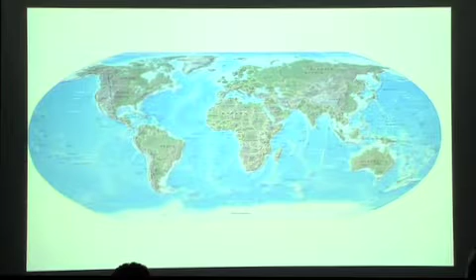It's all very simple because Antarctica is the little white bit at the bottom - that's where penguins live, just in case there's any doubt. The bit at the top is where the polar bears live. So we're doing mostly penguin land for about 90-95% of the talk, and we'll just touch on polar bear territory at the very end.

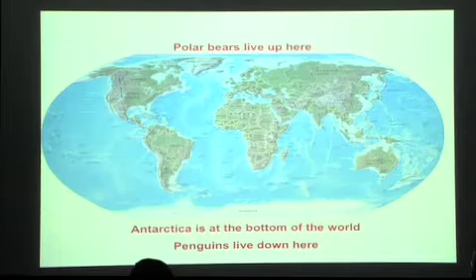But it's also a very dynamic continent, because changes in sea temperature over the last 100 years, which are accelerating significantly at the moment, are creating dramatic change in the Antarctic. I'll talk a little bit about that later on.

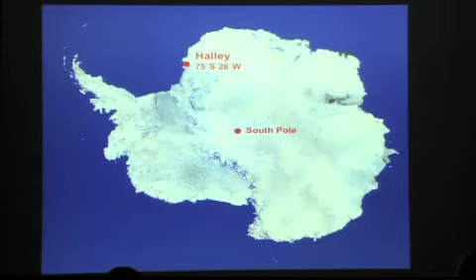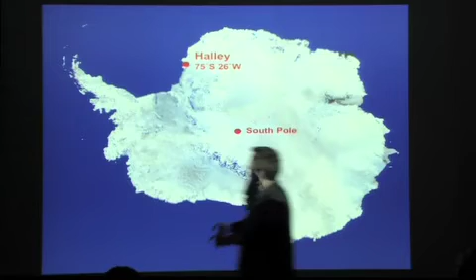The South Pole has an American station, and the station I'm going to talk about first is called Halley. It's a British research station at 75 degrees south, about 900 miles from the South Pole. Britain has 2 big stations in Antarctica - one at Halley, and the other at a place called Rothera.

When you join Rothera to the South Pole and the South Pole to Halley, that is the area of Antarctica that Britain traditionally claimed, although all countries have recently renounced their claims under a special collaborative treaty. Nonetheless, our stations are positioned absolutely at the edges of our territorial claim.

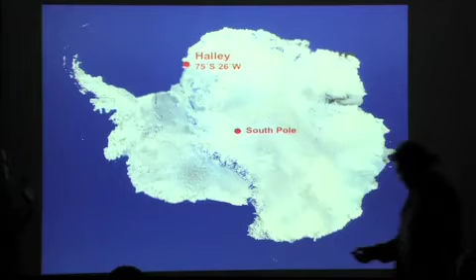Now, some countries maintain their claim by having soldiers there or an airport. But the British, we maintain our claim by having 2 stations, and we mark our territory by having a post office at each of them.

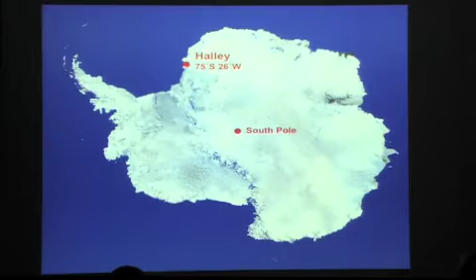You can click there. Yeah, brilliant. Oh, can I flick for the slides as well? Oh right, okay, that's good.

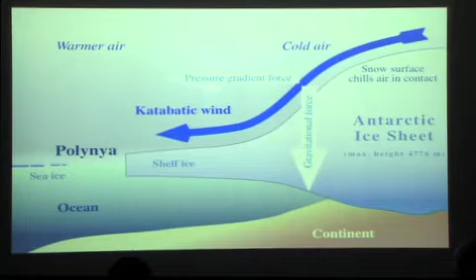So, as I say, it's located on an ice shelf. The ice shelf itself is about 150 metres thick, and it's flowing at a speed of around 400 metres per year out to sea.

Now I was just going to tell you about some of the main issues of climate that they have to deal with at the station.

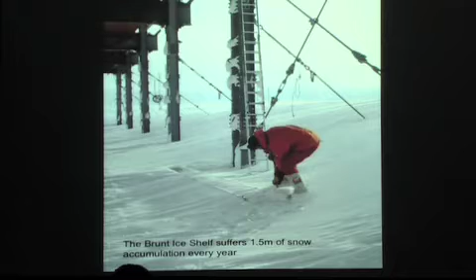And that's exactly what's happening with Halley 5, the current or just previous station - year on year, the snow level is rising by 1.5 meters. Anything you leave on the surface gets buried, so they have to deal with that by looking at ways in which they can elevate the building above the snow to stop it being buried. And that in itself is a very complicated process.

But because the snow level is rising by 1.5 meters every year, they need to jack it every year using electric screw jacks attached to the legs, which help to push it up another 1.5 meters. But because the legs are only a certain length, they have to weld some steel on the top of those legs. And then they have an additional problem.

The ice moves like water - it literally flows one plane over another. So those 20 legs all get distorted in different directions - one's going that way, another's going that way, and the legs all start pushing themselves in different directions. So every summer, a steel crew used to have to go out to Halley 5, and they used to grind off the legs at the snow surface.

Then they'd straighten up the leg above, weld in one of these big steel plates, and weld the leg back to it. Once finished, everybody on base works together to jack the station up. So this part of the leg is last year's bit, going down there, but the next bit of leg goes up here, and the next year it'll go somewhere else, and so on, until it's literally all over the place. The bottom is now about 30 metres below the ice surface.

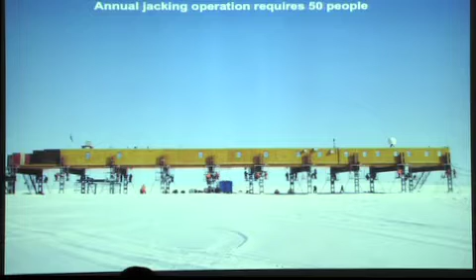But in the summer, the sun rotates all the way around the building because it never sets, since you're at the bottom of the southern hemisphere. As a consequence, when the sun moves off your basket, suddenly you're working at minus 20 degrees holding bolts and spanners, and it becomes a very, very cold process.

And you have to add to that the fact that people are living there — only 15 or 16 of them on a winter's crew. The winter lasts from February all the way through to December, so the winter period is 10 months long. There's 16 of you just living on the base, with no access by aeroplane or ship, so you're totally isolated. Add to that the cold, the wind, and then the next issue to do with human isolation is 3 months of total darkness.

So these people, from about the middle of May through June, July, to the middle of August, will not see the sun rise. All they will see are these spectacularly starry skies and displays of the southern lights.

But they have some neighbours — a colony of emperor penguins, which they go and visit every now and then.

When it comes to December, the base is restocked. That's the one time of the year they get any fresh food. So for about 2 weeks in December, they eat fresh salads, fresh vegetables, and fruit. Otherwise, everything is tinned or frozen.

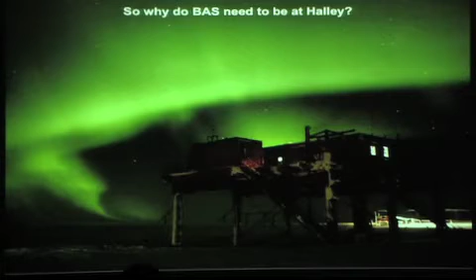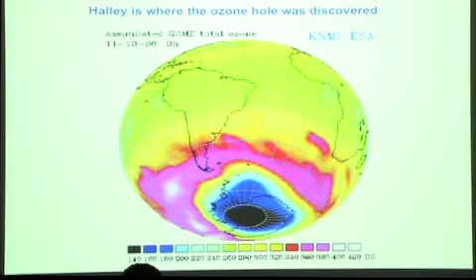So you might think, well, it sounds a horrendous place. Why would anybody want to work or live in a place like Halley? And the answer is very simple: it's because the science is worth it. So I'll just briefly explain why. First thing, 1985, 3 British scientists working at Halley discovered the hole in the ozone layer, which is probably one of the most important environmental discoveries of the last 30 years, and it led to the signing of the Montreal Protocol, which banned the use of CFCs, which again is one of the most important pieces of environmental legislation probably introduced around the world.

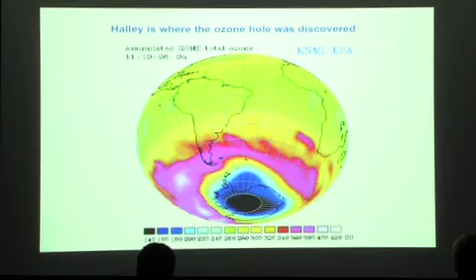So in addition to studying ozone and climate, Halley is also a fantastic window on space. It's at 75 degrees south, which is one of the best zones on the planet for investigating the interaction between the sun and the earth. Incredible research is carried out there into the thickness of the outer atmosphere and the impact of solar particles bombarding the Earth's atmosphere. And those kinds of pieces of research are what give us the information about global warming. So it is absolutely at the forefront of the research which is telling us about changes in the Earth and the systems which govern the operation of the Earth.

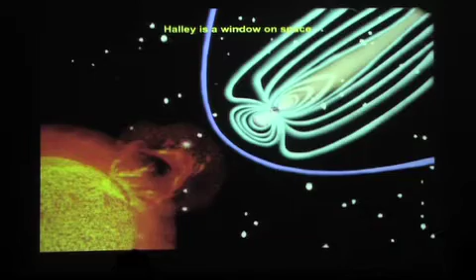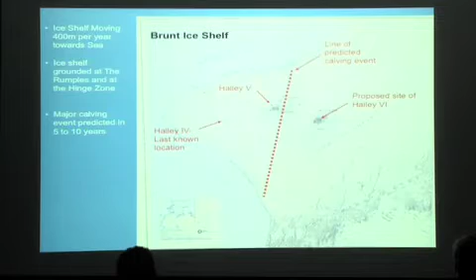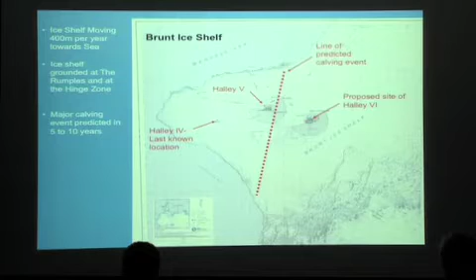And so where it's grounded, it starts flowing slightly slower. So a crack is appearing here, and there's another crack here. And the crack will slowly follow this dashed line. As you can see, Halley 5 is on the wrong side of the dashed line, with its legs stuck 30 metres down in the ice. And that causes, obviously, a significant problem. There's about 5 or 10 years predicted until all the stuff off to the left, which is about the size of Wales, disappears on a giant iceberg.

So as a consequence, the British Antarctic Survey realised they needed to do something. And, of course, when you need to do anything, the best thing to do is to hold an architectural competition. So that's exactly what they did. They held an architectural competition to come up with a wholly new way of designing a research station which would help them to overcome this problem that they'd had. Halley 5 is named because there had been stations before it, with the problem of all the previous stations disappearing on an iceberg.

So they had this competition to find a design for a relocatable station. They had 86 entries from around the world. 6 teams were shortlisted to develop their designs. Then they chose 3 who then did a much more detailed design. And then out of that, we were very lucky to win the competition.

Before I show you our design, I'll give you a whistle-stop tour through the history of Antarctic architecture. You might be thinking this is going to go on forever, but the truth is it's a very short subject. It's 100 years long, but there are probably only 3 different building types.

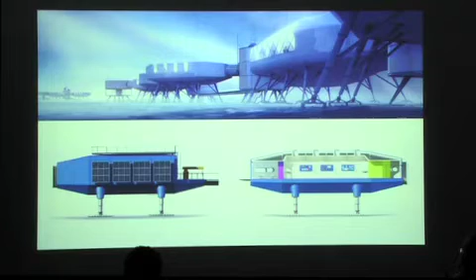When it comes to relocation, each one of those modules can utilise hydraulics to lower down closer to the ice surface, bringing its centre of gravity down closer to the ice. They can be rigged up with steel bars and then use the skis and tractors to be pulled to a new location.

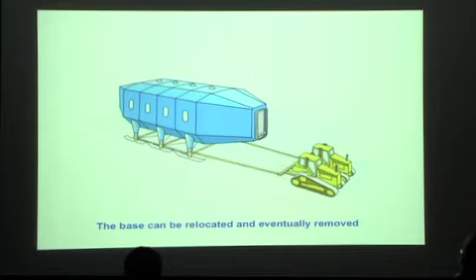Within each of the modules, the start planning device was really the bedrooms. A lot of thought had to go into the bedrooms because we wanted them to be comfortable, but we didn't want them to be so comfortable that people just hide in their bedrooms at the expense of the overall community. So they have a place that you can sit and work at a desk. They've got quite a bit of storage, a nice view onto the ice, but they're not so comfortable that you can have loads of people in your room or hide in there watching TV, literally escaping from the community. In the winter, you get a room to yourself. In the summer, you share with somebody who's coming in, sometimes for a few days, sometimes for 2 or 3 months.

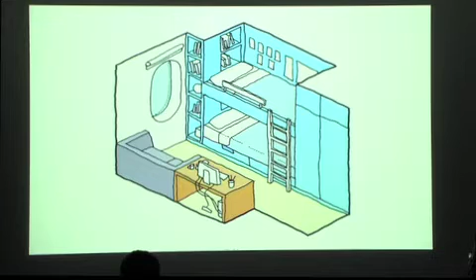This is the kind of basic plan of a module. You had 4 bedrooms, either side of a central corridor, and to break down the feeling of corridor, we have enlarged threshold spaces where you move from one module to another, giving access into things like the toilets, showers, storage rooms, but also views out into the landscape. So there were spaces of light and dark as you move along that corridor. The corridor widens out where you get the doors into each of the bedrooms, and it also has a higher ceiling with roof lights in to allow some light in the summer.

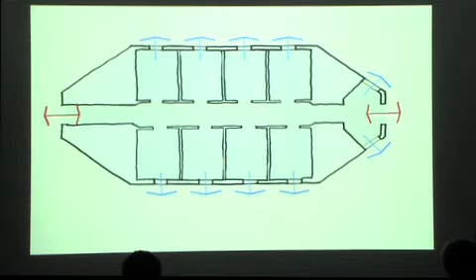Within the bedrooms, one of the areas where we put a lot of research was looking at how to help people overcome the issues of 3 months of darkness. Because in the darkness, you can have this terrible problem of falling into a sort of biological free fall, where, because it's always dark, you stop recognising the time to get up. So instead of getting up at 8 or 9 in the morning, you get up an hour later, and the next day, another hour later. Before you know it, you're getting up at 8 or 9 at night, and all your friends are still getting up in the morning.

We also worked with a colour psychologist called Angela Wright, and she developed a special palette of colours that we've tried to use through the majority of the station. She called it the Spring Palette, and the idea was both to assist wayfinding, but again to give a bright palette which helped people overcome that constant issue of darkness and seasonal affective disorder that you get in the winter.

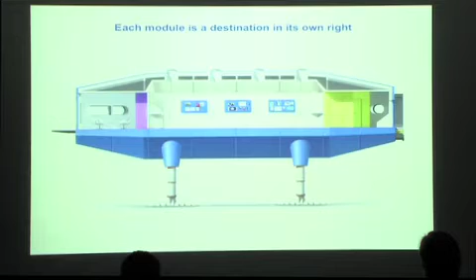Through that use of colour, volume, and thresholds, we were working at a very elementary architectural level to make sure each module became a sort of place in its own right—that every time you entered a module, it felt like a point to stop, to breathe, to think, 'alright, I'm doing this, I know where I am in the station,' rather than just having one single-width, long corridor running along the whole building.

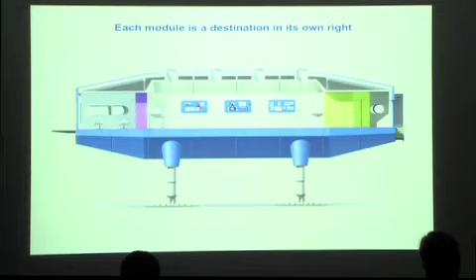And you might be thinking, 'oh, I wonder why you even had to have them in a straight line'—I'll come to that in a minute, but it was a very important climatic feature which forced us to do that.

As well as being a place to live, Halley is also a place of phenomenal scientific research. One of the most important features of that is to give as much flexibility as possible to allow significant changes in direction of scientific research to take place.

Each of the modules has a three-dimensional space frame substructure, which gives lots of space for service distribution within a warm envelope, and its superstructure is all on the outside. So all the walls and ceilings can be demounted and changed when we need to account for different experiments.

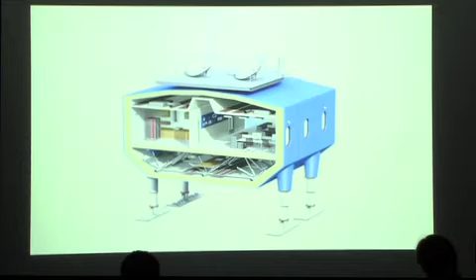With that whole concept, we were able to accommodate virtually all the features required of an Antarctic research station. But there was one thing we were having real trouble with, and that was the main communal space, because it just couldn't fit in one of these blue modules. You needed more space than that for kitchens, dining rooms, a bar, and other recreational spaces.

So the solution was to design what we call the central module, which is the focal point of the whole design. This is a two-story module. One of those blue modules is about 160 square meters in floor area, this one's about 360 square meters, so it's a bit more than double the size.

On two floors, with as much open plan space at the lower level as possible, so that you get people having a meal, playing pool, in the bar, all sort of doing everything together.

That was a very important design decision, because we had noticed in a lot of stations that they had broken down activities into cellular spaces, and you started getting very disruptive cliques building. You'd get the gym clique, and they wouldn't allow the odd tubby bloke like myself to come in and just do half an hour a week.

And then you'd get worse than that, you'd get the drinking clique. They would shut the door on the bar, and someone who just fancied the odd beer felt uncomfortable opening the door, hearing them all having such a good time inside. So we were very keen to break down as many of these potential cliquey barriers, just with very simple, open plan designs for space.

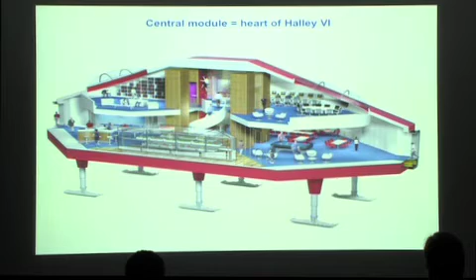There are two other features in here, neither of which, unfortunately, we've been able to include. One is a greenhouse which grows fruit and vegetables using nutrient-enriched water. It's a process called hydroponics. There's all the infrastructure in there.

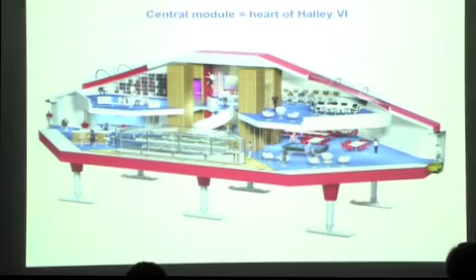The idea was that would give people salads during the long winters, but we haven't managed to install that as yet. The other feature: we thought, well, people in the Antarctic are really outdoorsy. They all love doing skiing and kite surfing and loads of sort of cool outdoor stuff, so I thought we'd better bring a little bit of that inside.

So as an alternative to the stair, we introduced a climbing wall as the means to get from the lower level to the upper level. To start with, they thought, yeah, that's a really great idea, until the health and safety officer pointed out that the climbing wall is just next to the bar, and the two may be sort of mutually exclusive. So they decided to get rid of one of them.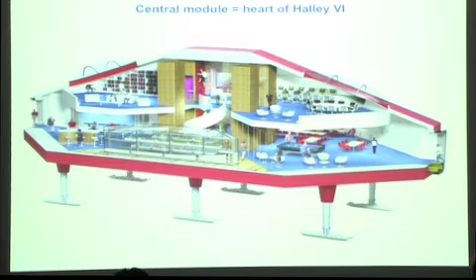These are just some views from a fly-through we had done, which show the inside. You can see the open plan spaces on the top two shots, and then some of the more enclosed spaces on the upper level.

On the two main spaces in the upper level, we have these big domed roof lights. The point of those was that you could then walk into those and be fully enclosed in glass, so that in the winter, when you get the southern lights flashing all around you, you could have that experience as a sort of full semi-dome experience happening all around you, which is a pretty awesome experience in its own right.

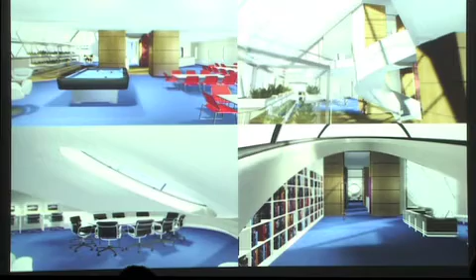Now, this is the explanation as to why the station is arranged in a straight line. For 95% of the time, the wind blows from one direction only, east-northeast.

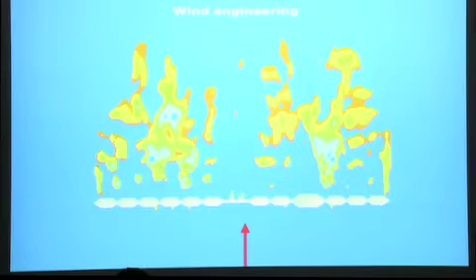So the wind blows towards the modules, and then as it passes underneath, it starts decelerating again and drops it in giant drifts. This was from a computer fluid dynamic model, which was done by a special firm of wind and snow engineers from Guelph outside Toronto.

Who were predicting where the big drifts would take place on our building. When we went to see them to start with, we had an arrangement that was more like an X shape with our central module at the middle. And they very quickly demonstrated to us that the first line of the X, the wind would accelerate underneath, pick up snow, and then it would very quickly bury the second line of the X. So they said, this is what you have to do to get this building to work.

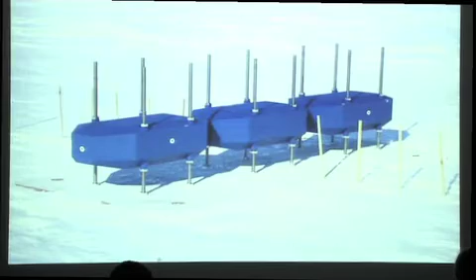We thought, well, that's all great. We've had computer models done, but we need to be really sure that this drifting analysis is all going to work. So we did some smoke testing in the Building Research Establishment in Watford, and then we also had these scale models built. We put them on the ice at Halley. And then the scientists worked out that if you got a wind of a certain speed on a certain day, at 1 to 50, that would equate to the wind through a whole winter season.

So we put these modules down facing the direction of the prevailing wind, and then one night there was this big storm, which they say equated to a whole winter season of storms at 1 to 50. And then we got snow drifting all around, but we could see that the wind speeding up underneath had cleared all the snow and ice away from the ski-based foundations, keeping them free from snow.

So having established that it was going to be a line, we then had to decide which things went where. We put all the sleeping off to the north end with the main command module, which is where the base commander, the doctor, air traffic control and so on are. Then our main social module, and then at this end, two science modules, and then two of those mechanical equipment modules, so that you could have generators in both.

And then we separated them with a bridge. The reason we did that is because if there's some catastrophic failure or a fire, you could escape and live in the other half until you can be rescued. And you might not be rescued for 6 months. There's no fire service, no support structure, nobody to come and get you, and it's too cold to fly an aeroplane in and too difficult to get a ship there. So you've got to be able to look after yourself until the emergency services can get in. That bridge is really there as a giant fire barrier between one half of the station and the other.

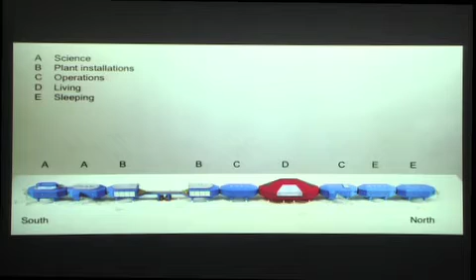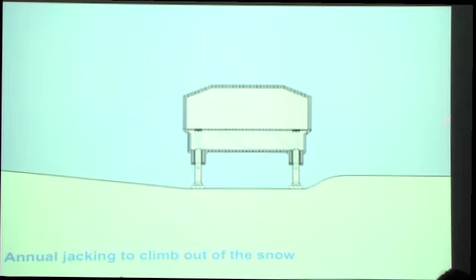Now, I thought I'd just quickly explain how that whole jacking process works with the building, to show you how it rises up out of the snow. So here you have a module in cross-section at the end of a year of snowfall. The wind is blowing in this direction here, so it's 1.5 meters above the building.

The wind hits here, speeds up underneath, picks up all the snow that otherwise would have accumulated, and then starts forming a giant drift heading off towards Madame Tussauds. And then what we do is use the bulldozer, lift the legs up, push new snow underneath, and jack the building in small measures to raise it above the snow level to get it all level again. I'll show you a movie of the final effect of that a little later on.

The next technical issue was how do we make the outsides of one of these buildings. We looked at all sorts of different solutions: highly insulated timber panels, highly insulated metal panels. But in the end, we settled on glass fibre panels. Glass fibre is used quite often in the Antarctic because you can make very large panels, which makes the construction much simpler. Also, glass fibre is thermally relatively unconductive, about 100 times less conductive than metal, for example. So you get much less expansion and contraction between the cold and when the sun hits your building, so your joints between panels are more stable, and you risk losing less heat through your envelope.

And here are just some of the earlier examples of glass fibre panels. These panels at the French-Italian base are that height from there down to there, which is about 20 metres high.

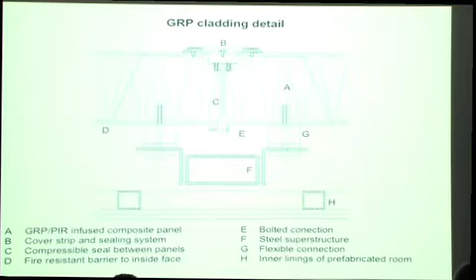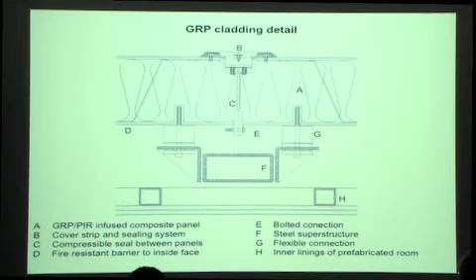I won't go into the nitty-gritty of the detail, except to mention two things. One is that our glass fibre panels are about 200 millimetres thick, and they're fixed back to a steel structure. The glass fibre was made in a vacuum, and we had glass fibre strands connecting the inside to the outside, so that when you get really massive suction from the wind, you don't get the outer skin being ripped away from the inner skin. We used a special kind of insulation called polyisocyanurate, which has closed cells of foam, so that you don't get any water migrating through the foam from one side to the other and freezing in the process.

The development of those panels took an enormous amount of time, because they have thermally very demanding criteria that they need to meet, but they also had very high levels of fire resistance that they had to meet. Combining those two processes in glass fibre panels was not easy, but it was achieved in the end.

In terms of energy, we wanted to use sustainable measures like wind and solar. The trouble with wind is that it blows so fast in such fierce gusts that most attempts to introduce turbines have ended up with the turbines scattered in small pieces all around the station. This is a German turbine. It's supposed to operate at 20 kilowatts, which is quite a lot of power, but they have to keep the brakes on and run it at 1 kilowatt, otherwise the turbine has a habit of flying off the shaft.

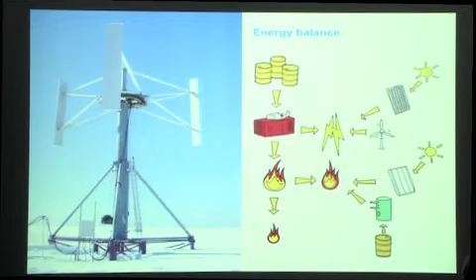We've got the capacity to introduce solar power, to use for heating up water in the summer when it's bright sunshine all the time. But of course you only get sunshine in the summer, and you don't get any solar energy in the winter. So in the end we've used generators, but a special kind: combined heat and power generators, which means you can catch the heat off the generator as it makes electricity and then use that heat to heat up the building. So we don't have to generate any special heat to heat the building - it all comes as a consequence of the electrical demand for things like science experiments, TVs, computers and the like.

We also had to max out on prefabrication. So here you can see the sort of base structure and services of a module, which is this three-dimensional space frame, with all those services pre-installed as long cassettes that can then be slotted into the structure.

In terms of the plan, off to the left-hand side, that's one of the main energy modules. That's got most of the big gubbins that you need to make the building operate: generators, water treatment systems, fuel, and so on.

But then each module in its own right has a smaller plant room, which has all the air handling and humidification and the hydraulics which drive those legs. The reason we have those smaller plant rooms is so you can just duct the air round one module in itself, without having to have ducts passing from one module to the other, which, because the modules might move slightly differently to each other, might end up with cracks and things like that happening in those ducts.

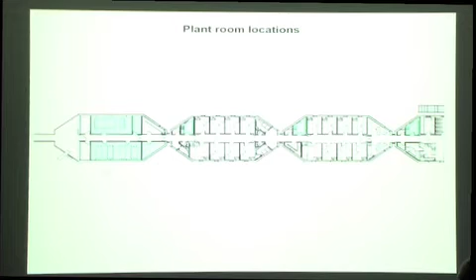In terms of water production, in the summer it's a really good fun communal activity. Everybody gets their spade out, and they dig snow and shovel it down a great big shaft which has a big heating element in the bottom, and it melts water, which can then be used for showers, for cooking and so on. And that's really good fun in the summer - you chat, having a laugh.

Winter time, it's slightly harder. So here they are having to wear helmets so that they don't get their faces ripped apart by the ice crystals that are being blown around at 100 miles an hour.

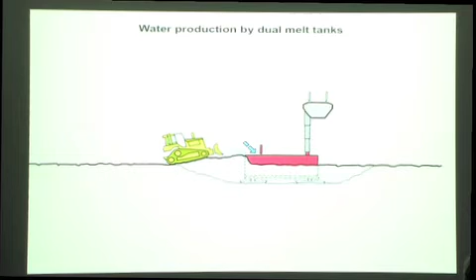We've overcome that to a degree by having bigger surface level shipping containers with heating elements in, and then you can just lift a lid and shovel snow in for most of the year using a bulldozer. But in the winter, in the depths of winter, for about 4 or 5 weeks they still have to get the shovels out.

In terms of water usage, we introduced lots of special fittings which reduce the amount of water necessary. It's a kind of bizarre thing with water production in the Antarctic. You're surrounded by 90% of the world's fresh water, but it's all frozen. To create the water you need to drink, you have to melt it, which uses a lot of energy, which needs a lot of fuel, which is really expensive to deliver. So water production becomes a very carefully managed process.

If you have a shower, you're not allowed to have a shower for more than 2 minutes. You're supposed to turn the shower on, get wet, turn it off, put all the soap on, turn the shower back on again, get the soap off, quickly get out again. So there's no long lounging around in the bath when you're in the Antarctic. When you brush your teeth, put the toothpaste on the toothbrush, get it wet, turn the tap off. Everything is very conscious of using as little water as possible.

In the UK, we probably each use about 160 litres of water a day through our own hygiene, cooking, drinking and so on. At Halley 5, they'd cut that down to 100 litres a day. At Halley 6, we've cut it down to 50 litres a day. The main significant change we've made, apart from more updated fittings, is we've got a vacuum drainage system like you get on an aeroplane, which means that instead of using 9 litres of water to flush a toilet, you're only using between half and 1 litre. It's had a significant impact on reducing water usage and therefore the energy needed to melt the ice and the fuel they need on the base. As a consequence, we've cut down the amount of fuel to operate the base by 26% per square metre compared to the previous station.

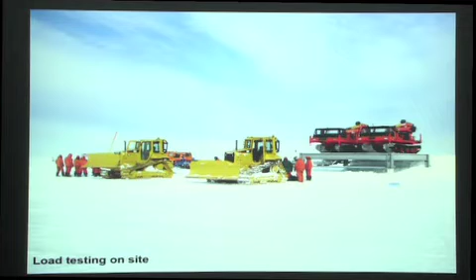In terms of construction, we started building around 5 years ago, but you can only build in a very short 10-week period when you can get the construction crew through. So we had to maximise the amount of prefabrication and testing done beforehand. The first thing we did was build some test sledges to make sure we were going to be able to pull those modules, each of which was going to weigh about 80 or 90 tonnes. That was all very successful.

Here we are doing some of that fire testing I mentioned. All our panels were made in Cape Town, South Africa, so here we are testing some of those. Crucial to the process, we built some test modules to make sure everything would fit together, that the hydraulics would work, that the cladding was as thermally efficient as we hoped, and that the building was as airtight as we had presumed.

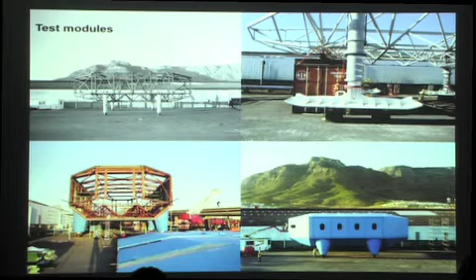Here you can see the test module for the big red building. It demonstrates the value of this process, because when we put this together, you can see there's a panel just here that doesn't quite fit. If you're 15,000 miles from the UK, or even 5,000 miles from South Africa, and 30 days sailing, that little problem can be a real pain, because it means you can't get another panel for another year.

But the benefit of building this test module is that we were able to take that panel off overnight, take it back to the factory, trim it down to size - another benefit of using glass fibre panels - and then slot it back in the next day, and it all fitted perfectly. Just after I took this picture, there was an enormous bang, and I thought, oh my God, something's collapsed. So I went for a quick walk around, and just behind, I saw 2 pickup trucks that had smashed headlong into each other while staring at this strange red thing in the middle of a residential community in Cape Town.

From Cape Town, everything was loaded onto this giant Russian icebreaker, the maximum sizes within the weight restrictions of that 2-metre thick sea ice. This is the biggest component, the substructure frame of one of those modules. It's unloaded onto the sea ice and then attached to a bulldozer that pulls it across the sea ice up onto the ice shelf.

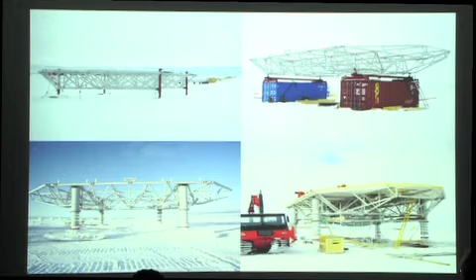When it arrives at the ice shelf, that's the top left-hand picture here, it's then hoisted up using a crane onto these 2 shipping containers. Then the heavier hydraulic legs with the bigger skis were installed. And once installed, they put on these prefabricated floor cassettes which provide a working platform from which to erect the rest of the module.

Here you can see them installing some of the prefabricated services. You can see those are drainage runs going in, and here's some of the prefabricated components for some of the plant modules.

We didn't really have much influence over the design of some of this equipment, except they made one small mistake - the plant fabricator rang me up one day and said I could have any RAL colour I liked for the fuel tanks. So I gave him a bright pink fuel tank, which hasn't gone down that well with some of the more macho mechanics who work on the station.

Here you can see after that's installed, the superstructure steel frame is then installed. In some of the other modules, the rooms were all prefabricated, so bedrooms had all their furniture installed - walls, floors, ceilings, bunk beds, desks, chairs, wardrobes, duvet was in there, pillow was in there - absolutely, completely finished.

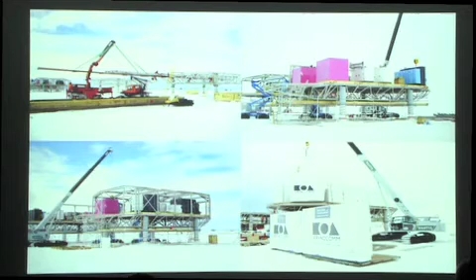And then here, with each of the modules with their prefabricated rooms, the superstructure installed, and then from there the cladding goes on.

One of the benefits of using the glass fibre cladding is you can make really big panels which means they can be installed quite quickly. So that panel being installed there is about 4.5 metres high and about 10.5 metres long - a pretty sizable piece of construction.

It's being fixed back to the superstructure so that they were able to clad all the modules in one 8-week construction season, which is really pretty speedy. They were pre-installed with the glazing as well.

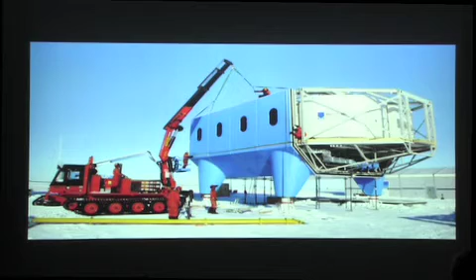And here you can see the blue module having some of its prefabricated glazing installed.

The whole construction was managed like a kind of factory line. So you had a team working on blue module cladding, a team working on blue module steel frames, a team working on the red module, so that everything was moving along at similar stages, almost like it was a product, which of course is one of the benefits of modularity.

And then when all the cladding was on - we're now at the sort of middle of season 3 - when all the cladding was on and some of the interiors had been installed, the modules were lowered down on their hydraulics and linked up to these bulldozers.

And the reason they did that is that all the early construction had taken place at the site of Halley 5. The reason for doing that was so they could use the sleeping accommodation and the services of the chef and all the other infrastructure which existed at the old base to support the construction crew.

But having got the modules to a certain stage, they then lowered them down, linked them up, and pulled them to the site of the new station. Here you can see the red module disappearing off towards the Halley 6 site - it's about 15 kilometres away.

And now I've got a short movie just showing that relocation of the red module.

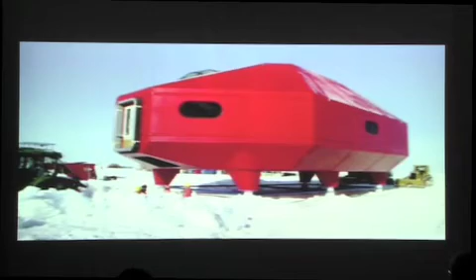Surprisingly, it pulls out relatively easily for a 200-ton building.

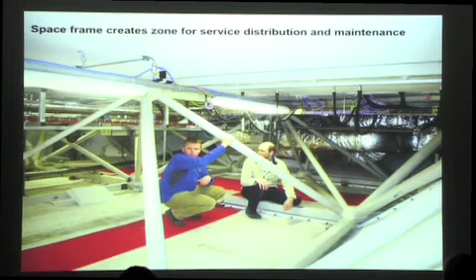And here you can see some of the service distribution within the space frames of the modules. And here the hydraulic leg, and there's a line of lighting underneath as well, which is just to help people when they're doing maintenance in the winter. And these flashing red beacons light up when the hydraulics are in operation as a warning light.

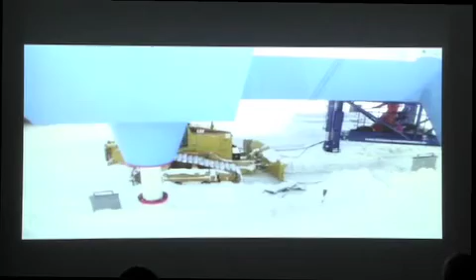Next, the modules - this is the raising of the modules for jacking. The jacking frame is brought in.

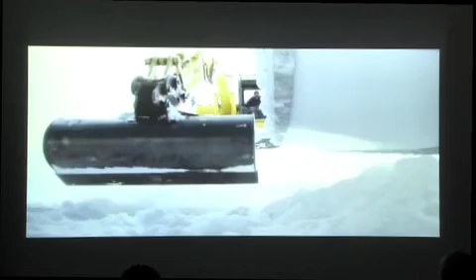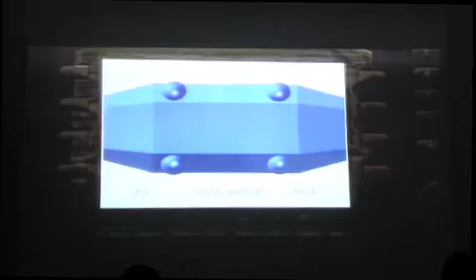Snow is infilled under the ski. The ski is then placed back onto a heap of snow. This continues all the way along the length of the station. Once all the legs are up, the first jacking takes place.

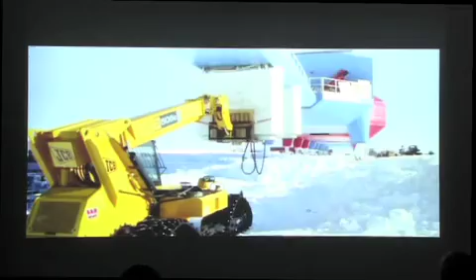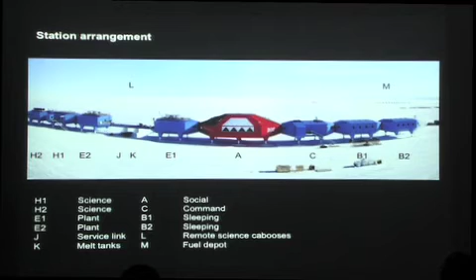Then the process is repeated for the second jacking. The melt tank is placed back in, and here we see everything all linked up and now fully operational.

On the tops of the science modules, we have these decks where all sorts of pieces of science equipment can be installed, taking measurements of the atmosphere, climate, and so on.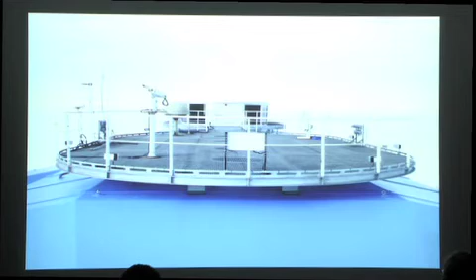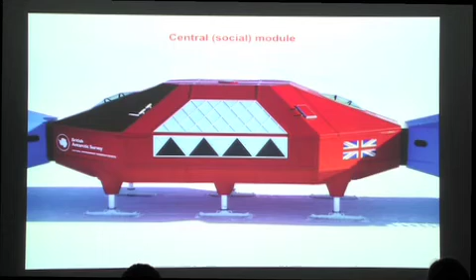This is the main social module, the central module, and that white glass area is the double height space where people go up to the upper levels. The white glass is actually a very high performance insulated glazing which comes from Germany, insulated with a material called nanogel, which was developed initially for the space industry, allowing light to pass through but giving a very high U-value performance. The black stuff is actually clear glass, but it's like sunglasses because you get so much reflection off the snow.

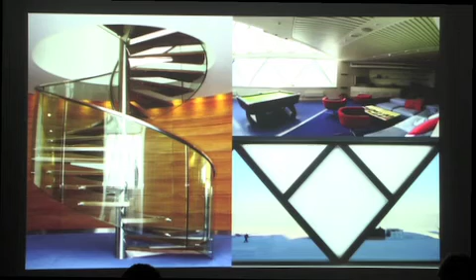This is the inside of the central module, and the staircase leading up to some of the upper levels. There you can see the impact of that white glass, letting a lot of light in while giving clear views. You'd hardly believe that black glass was giving you this clarity of view, but it's just like sunglasses, basically.

Here's the upper level with those domed roof lights, which you can stand in to look at the auroras in the middle of winter.

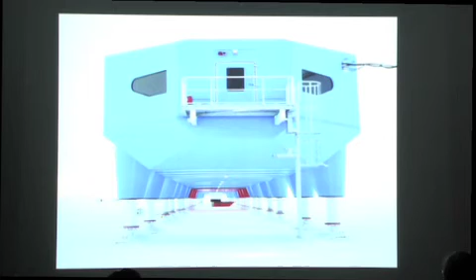Moving on further down, these are the bedrooms, the bedroom corridor, and at the very end there's a space we call the quiet lounge, where people can escape from the community if they want quiet time but don't want to sit in their bedroom. This is the very end of the station with that quiet lounge, which has its own small balcony, also used for escape.

They have left their mark with this iconic structure in Antarctica, which will help facilitate science now and in the future. The last of the BAS staff head homeward on the JCR, leaving the winterers behind to start the day-to-day life of an Antarctic winter at Halley.

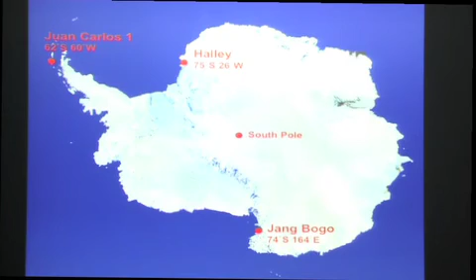Then there was another competition, this time for a Korean base, introducing a whole new layer of interest.

We started off by investigating the way that snow deposits. If you leave buildings close to the surface, they should run in line with the wind. If you elevate them, they need to be perpendicular to the wind so you can predict where the drifting occurs. But the Koreans were also very interested in a building overlaid with elements of traditional Korean culture, which in the Antarctic poses a significant architectural problem.

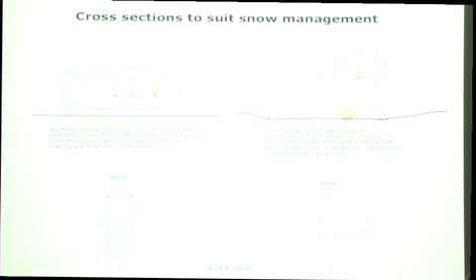We cast our eyes round some of the more iconic buildings found through Korean history and noticed the significance of the Gateway, demonstrating a transition from one life to another, from one level of being to another. We used that notion of snow drifting and its technical requirements together with the idea of Gateway to create this building, placing the primary accommodation in wings with the main social module perpendicular to that, creating their own gateway to polar science.

Then, from the Antarctic, we moved up into the Arctic. At the start of this year we won another competition, this time for the American National Science Foundation, who operate a station at a place called Summit, the highest point in Greenland. It sits at the top of the Greenland ice cap, around 800 or 900 miles from the coast. The commission here is not to design the whole station, hopefully that'll follow on—to start with, it's to design a laboratory.

This laboratory is called an atmospheric research laboratory, and it basically benchmarks levels of pollution in the air around the world. They're looking for the purest measurement they can get in the northern hemisphere, which they get at the top of the Greenland ice cap.

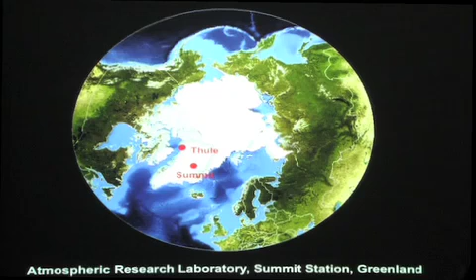But in order to get the purest measurement, they can't have any pollution in or around this laboratory—not just pollution from vehicles, but from materials. They can't use materials that give off any gas that would disrupt a single one of their measurements, and they're not talking about a tiny amount, they're talking about mega minuscule measures of gas. So every single construction component has to pass through the laboratory of NOAA, the National Oceanic and Atmospheric Administration, who test every material to make sure it won't disrupt the experiments. Nonetheless, the solution is quite similar.

It's an elevated module, this time utilizing much more solar energy to help meet the electrical demand. It stands on its own, actually bigger than one of the blue modules at Halley, and inside it's just empty—full of space to house incredibly technical equipment making atmospheric measurements, as well as measurements of the outer layers of the atmosphere.